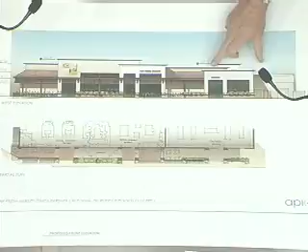That's part of the whole mass, so they really read more as 2 tenants now rather than a confusing 3 tenants of the last go-round. That addressed the height issues in terms of those pieces by themselves—we felt that was the issue in terms of them looking too high in comparison. Now with a longer, wider mass, we feel the proposal you're seeing here will create a better sense of entry and scale.

Additionally, as we've gotten further into our design, thinking about our standard equipment—some of which we'll see here—and also knowing there will be a mandatory approach to screening so you can't see rooftop equipment, the heights we're looking at now lend themselves to that screening application. We have a central piece of equipment that sits on the roof and would likely be visible from the front in our other presentation, so we think we're closer to something that will, at least from the front, conceal that piece of equipment. For your reference, the existing parapet height is this line here.

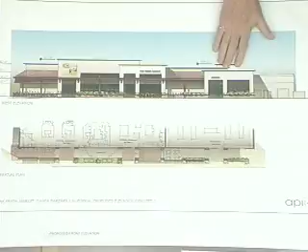We've raised this parapet approximately 2 feet on that side, just to give more of a stepped appearance to the facade. For clarity, this element here is an existing mechanical screen that we've just treated—it's right now a slatted metal. This little element is beyond, quite a bit back, almost towards the rear opposite facade, so it really looks like it's more of this facade than it actually is. It's in the background.

Additionally, to tie into the existing glue lam beams, which seemed to go over quite well, we were going to use those. In this theme, we've also incorporated a horizontal wooden louver to match, so there'd be a continuous wood theme throughout, with some extra support columns in certain locations to tie in—to give you a sense of what that louver does across the front of the building.

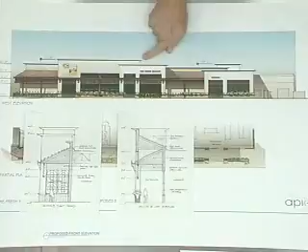You're looking at 2 sections you'd see in this application. This section here would be right through—where am I—this section with these roof elements here, right through here, looking this way. And this section here is right through this, looking in that direction. These 2 elements would be this roof here and this roof beyond here, and then the existing roof plane here with the glue lam beam running through the new columns.

And what you're seeing there is just this little wrought iron enclosure for the outdoor plant area that's under that canopy.

Okay, that takes care of item 5. We're down to item 6 then. Wow.

Number 3 was: restudy the main entrance facade to provide more architectural definition, not a single flat facade. Let's move back up to item 3, because that was a comment having to do with, in plan view, what you were doing to create definition between these. How did you address that?

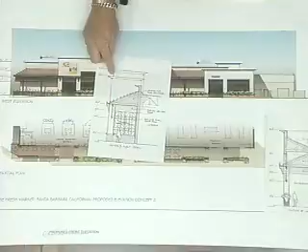Well, what we're proposing here is this particular facade is moved all the way out. This one is almost out, all the way out—that would be this line here. And then the next one steps back another 8 inches here, so there's an 8 inch difference between these, and these are completely separated. This is the existing tile roof, and this is the existing tile roof. This one actually pops out further than this face. These 2 are about the same also, but this one pops out in front.

I could just lay this down—this might help clarify some of that. Oops, I'm sorry, I got this backwards.

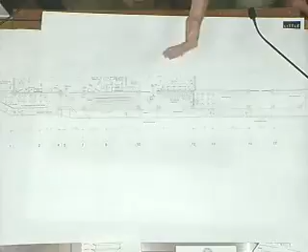Right now, the columns we're proposing, new columns here, start to generate that differentiation I think you guys are after, and we think there's even more opportunities. Perhaps take these 3, push them a little more forward, create a little more differentiation, and then that horizontal element that comes across the front of the building may have an opportunity to step back and forward with those architectural elements. So these columns are what we're seeing as that difference, and the path that we have to keep for ADA compliance and entry will help define some of those column locations.

Oh, there you go, that's a great way to look at it. So the three you see here would be these three here. Those could potentially come forward and help create a little more visual interest with this horizontal element we're looking to create across the front. So as those pieces step forward and back, it would kind of follow suit, allowing the path of travel to come behind it rather than in front of it. Exactly.

Number 4 was better harmonize the facade elements and provide appropriate signage space. Number 5 was section cuts, cut through the new entrance canopy portions. Number 6 was provide design details for the columns and parapet caps and cornices.

Since this is a new proposal, we are proposing a design that's a little bit more of a contemporary interpretation of the mission style. With that, incorporating more wood detailing in both the louver system throughout the lower portion, but also a wood cornice integrated into the upper planes as a cornice.

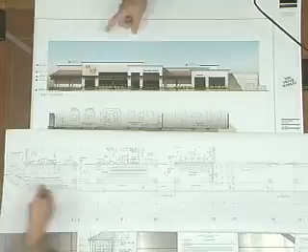But you've changed it completely, pretty much. This section right through here goes all the way to here. We were wanting a plan that showed clearly, a plan and an elevation, existing and an elevation, noting with notes.

They don't really have a consolidated drawing right now. We're kind of midstream, so to speak, on the concept, and we want to get feedback from you guys before we take the next steps. But in terms of what's there now and what you're seeing on paper here, there's most certainly a big difference. Right now, there's none of this. The front of the building runs along here, none of these columns exist. There's a few bushes that kind of follow the curb.

This is on an as-built plan, but they are right at the existing curb, and they kind of just dot along the front there. So there's really not a lot, but that's kind of the thing we really need to see, we'll save that for comments. That's kind of what we were hoping for. This is the existing, the way it is now.

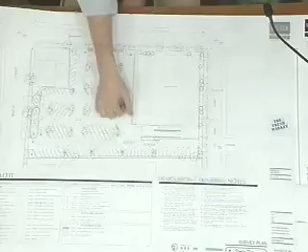And the next sheet is what we're proposing. That's what's there now, so what you don't see on this plan, you don't see the bushes themselves, but these are little concrete areas with dirt where they planted hedge bushes along the front of the building. Obviously there's no columns or anything else right now across the front of the building, just the overhang itself. Yeah, it's all open. And the proposed is where? Underneath.

So here you see the new columns, eliminating all those planters that are there. Yes, ma'am. Where are the new planters?

Currently, the plan shows planters here, but we see this planter as problematic, as well as something here and perhaps there too. I was talking to Jaime last week, and he thinks we may be able to do without them. They're not required elements. We had put them in there originally, but they conflict with some of the challenges we have now at the front and our use of space. So we think they go away at the end of the day.

So really, whatever landscaping you had, you're taking out, and you really aren't going to have any landscaping. Just at the front of the building, yes, at this point. For the front of the building? Yes, ma'am, exactly. And that was based on a very quickly developing change process.

This helps show us what's there now. We had a meeting on Wednesday, just before Thanksgiving, with Jaime, and got a little more feedback about those kind of details, and it would appear that we would likely eliminate those if possible.

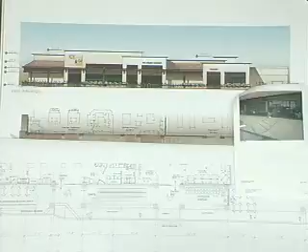Yes. We have looked at both here, and we have another example of signage. We've reduced the sign size to be more in keeping with the criteria. And there's a for-placement-only item here that we'd like to get your reaction on. We're thinking that's an artistic graphic, so possibly - just to clarify, this drawing represents what would be the 12-inch lettering that you guys typically approve.

Actually, we don't approve any signage. Okay, we just wanted you to address where you were going to propose signage for when you submitted to the sign committee. Right. So, okay, it's showing that part, and then it does show this kind of graphic application that we've got a few details to work out.

This right here represents what we think we'd likely apply for an exception on. You'd probably see the actual letters here. We think the graphic element would happen there, and then of course you'd see the tenant signage over here. This is closer to what we think in terms of this element, especially for the right proportion of signage.

We're off the street - we know that's a different conversation with folks, but it does represent our current thinking on signage. We don't think we'd see this. This is our signage guy maybe proposing, but that's likely not something we'd do, knowing the limitations.

All right, is that the end of your presentation? Well...

I would like to mention as well, part of the last comments and maybe understandings with the city was that the application we have here for the outdoor floral department - I think there were some question marks about whether that was allowed and could we do it here.

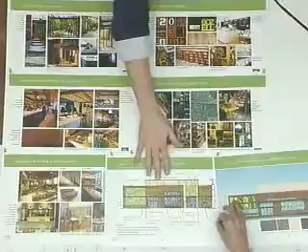It's that contemporary interpretation, exactly, of that mission approach. This was something the folks who put this together for us came up with, one of their first stabs at an elevation. Nowhere near what we're going to wind up with, but it was a result of trying to bring these elements to the outside. Then they went further to say, okay, here's some ideas about signage and more about this graphic element you might see. That's really what you'd see here, just a graphic at the end of the day. There's been a real design process on our side to bring the inside to a different point than we normally do in the store. This is really going to be a special store for us, and then we'll work with you guys to bring some of those design elements out and make this a real reflection of what we're doing on the inside.

Just before we go into questions from the board or public comment, a clarification from staff about the graphics. Doesn't the ABR or sign committee have limitations on murals? Don't we have issues with murals, Tony? Let me see what the sign ordinance has to say, but I think we'd consider that to be a wall sign, part of the sign, reviewed by the sign committee. I want to make sure we address it if we need to, and if we're not supposed to, we don't. That's the sign committee's purview. We did speak with Jaime on Wednesday about it, and we wouldn't consider it signage since it doesn't have lettering, it's more of a graphic. That's why I asked if it was considered a mural and whether we should comment on it or whether sign committee should. But as an architectural element, perhaps it's in your purview. Perhaps it is, I just need clarification from you, Tony, before we spend time talking about it.

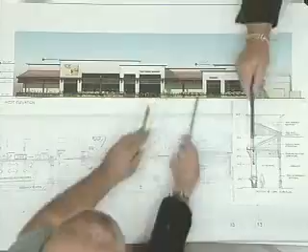Does this come around the columns at this point, does it come through? How far proud is that from this? It's showing one long line. Yeah, right - this will die in between these two columns, and this is projecting out in front. So it's just one line that comes through these columns, is that correct? This section here is popping out in front. And this can actually all be in one line because this is set further back.

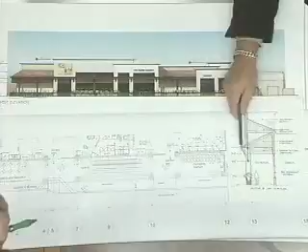8 inches back - right, same here. I think the dimension you're after is probably 18 to 24 inches, that it would project off the face of any of those new facades, and even the existing roof element here. And this is solid, or does it go back? It's right here - the existing roof ends somewhere close to here. This 18-inch projection is what you're asking about, from here to here. Those existing projections become the structure, so to speak, for that new element to rest on.

Part of the problem is we're asking these questions because the drawings don't give us the information we need. We don't have a line of existing roof, we don't have a line of new trellis. Also these columns right here are at the same plane as these other columns - but you're telling me these ones are 8 inches back, so I'm having trouble knowing what the depth is. We realize that some of those details aren't quite fleshed out yet. This was simply because of the comments from the last meeting - we went back and rethought the issues. We still have some thinking to do. We're looking to get your comments and take that next step on design, probably defining that stuff in a more comprehensible way. But I think there's enough here that you get the general idea of what we're trying to achieve design-wise.

Any more questions, Gary? Yeah, on the graphic right here, is this going to be a graphic that changes, or is it going to be a permanent type graphic? Is it going to be adhered to the plaster, or is there going to be something proud from that? We talked about it, and it's probably to be determined, but likely it's not something that changes with any regularity. It's likely an element - we talked about maybe a metal mesh that has screen printing on it, but it's an architectural element that is attached to the building.

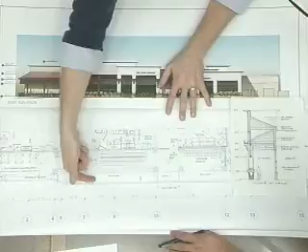Jose is working with the folks in traffic to get some of the details, but in the unlikely event that can't happen, we're thinking we have a curb cut here, an apron here, curb cut here, an apron here, and because of those details we can't allow ADA compliant pedestrian traffic to flow in front of the columns. So the approach may be to bring these elements forward as far as we can and let traffic flow behind the columns and then get to the other tenant spaces over here.

You haven't resolved that yet? We haven't. It's an easy adjustment, it doesn't really affect to any great degree what you see here, it's just you'll see those elements. It does affect it a lot, probably 4.5 feet, if the columns come forward more.

Well, from a strictly elevation standpoint, you wouldn't see much of a change. From a sectional standpoint, yeah, you would see the difference. It would allow us to have much more dimensional interplay between how far this is out and where this is. Right now we're dealing with the ADA setback there that only allows us 8 to 10 inches, where if we move this forward we'd have much more flexibility to get plan variation to the elevation.

And to your question, as a maybe primary entry point - if this element was pulled forward, it may have more of a statement about that primary entrance. Most definitely, and give that main signage field a better place to live. Thank you.

Thanks Paul. Kirk, I just have one further question - last time it was mentioned by Tony that this corner dining spot was possibly set back. Is that correct? The question was the front setback, and we determined that an outdoor patio seating can encroach into a front setback there. Okay, that's my only question.

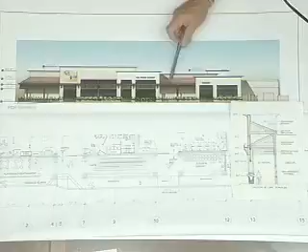Thanks Kirk. Stephanie - the color scheme that you presented shows kind of 3 different colored stuccos, I see. Is that your intention? Well, certainly 2. It is pretty prevalent, these 2 colors, the white stucco and the off-white stucco. I think with the dimension of the barrel tile that we have, that could be this same color as well, but it's meant to give a foreground and background appearance to these elements, helping them stand out. I think if we move this architecture out in plan, it'll be even less necessary.

But we could certainly, for the next go-around, if your concern is we have too many colors on the building, step that back to these 2. I guess I'll save it for a comment. Any more questions? Yeah, Stephanie?

I just have one other question - regarding the planting, you're showing planting on the elevation, not on the plan, and then verbally you're representing that there probably won't be any planting. So why is the planting on the elevation? We just haven't had a chance to make that revision, there have been several moving parts trying to come together to meet with you guys today.

Okay, and one other question - this section looks like tile on this lower band.

Is that part of the plan we're seeing here? If you look closely, there's a tile pattern on here in terracotta, and the hope is to get a good match to the terracotta on the roof tiles. In this case, it's on the building itself, as a wainscot on the building, and then around each column.

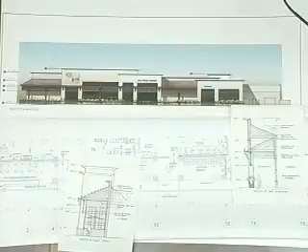Madam Chair, I have one more question, about lighting. Is there any proposed lighting fixtures on the exterior? There will be, but we don't have any specs on that right now.

There's that one section you did that had kind of a light detail on it. Don't want to confuse the issues, but I think it might be right there. I thought that was not a bad iteration for something we might consider. It's an element we've seen in some other places around here, something along these lines. We haven't fully defined that as of yet.

Any more questions, Stephanie? No, Madam Chair, I think I just had one. Compared to the last submittal, the comment we made was to lower the parapet height significantly. What was the existing height?

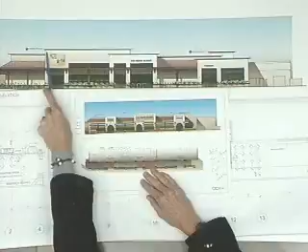How did you address that comment? So this one is 30 feet 8, and this is 33. So now you went higher here. These actually got higher. And these two got lower by 3 feet something. This one got the existing parapet height here, so this one is 30 feet 8 here. You were 30 feet 8 in this element before, so this got 2 feet lower.

This got over 3 feet higher. I guess if you want to look at three separate elements, you could say, compared to what you see as an element here, here, and here, yes, there was some change.

However, as I mentioned before, the thought process behind that was that because of the screening requirement, which we now understand to be a requirement, I'm not sure we were quite there before. Where the equipment sits on the building, if you don't have this component here to some degree, we'll wind up with screening that's going to jut up.

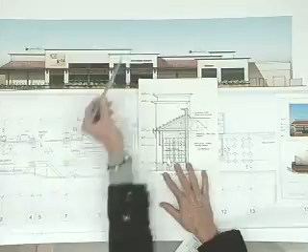That brings me to my next question. This is kind of a section cut through here because you're showing these two in the background. So it's through here, this one is. So what you're saying is that you need this height as justification for your screening, but it's screening from the public right-of-way. It's not screening from an airplane flying over Milpa Street.

Right, well sight lines are important, and they'll show us all the details. But sometimes when we're joking with people, we say that we're going to park a small bus on this building. Our mechanical equipment includes a Seasons 4 unit, a whole store unit. It's a fairly large piece of equipment, and it will have a height off of the existing roof line that will, at the end of the day, require some screening of this height range.

Are you saying it's going to be this tall? Yes, sir. We have a refrigeration rack up there as well. Well, the refrigeration rack sits further back on the plan. This piece of equipment is kind of center to a little forward, typically.

So here's my question. Here's my approximate line of sight from Milpa Street, which is the farthest place anybody would be looking to. If you're close to the building, you're not going to see rooftop equipment that's even that big over the existing building. But let's say, for argument's sake, you're way out here on Milpa Street, and you've got a line of sight that's huge. Your equipment would have to be 15, 20 feet tall in order to need to be screened by something that big.

15, 20, maybe not. To give you a range, the equipment itself is 7 feet high, and it typically sits on a curb that's about 2 feet high. So you're approximately 9 feet in height.

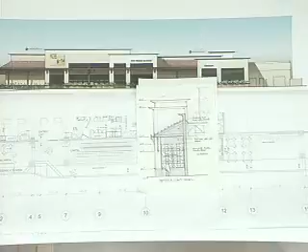But there again, that was the thinking behind leaving that as a higher element, was about screening. And also, I think there's a desire and intent to get a little visibility on this building. We're off the street a fair distance. We've got a lot of existing landscaping and foliage that can't go away significantly. So we're trying to counteract some of those with a double approach here, screening and also added visibility.

One of the other comments too. Really quick, because we're in questions and we're already behind by 15 minutes. We have to make our comments.

I just wanted to add one comment to that. I know one of the statements last time we were here was kind of massing the Fresh Market entrance and the other tenant space, and what this iteration also does is it kind of ties those two entrances together so that you can see where Fresh Market is and where the other tenant space is. Okay, thanks.

Okay, comments. Do you want to start, Stephanie? Sure.

First of all, to address the last comment, I disagree. I feel like these two, looking similar in massing and size and color, tend to make this look like those are the two entrances for this store, not the entrance for the other tenant.

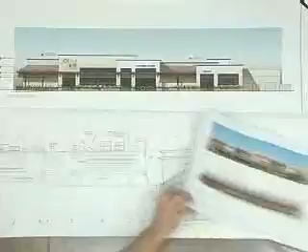And then the parapet heights, there's another thing I'm disappointed on. Even the existing parapet height went up from 24.6 to 26.8. It went up another 2 feet. So the very clear direction that was given last time... No, it went up to 30. I'm talking about this one, the existing one. Oh, you mean that one went up too? Yeah.

The two rationales I heard were, one, visibility for the building, and two, to screen equipment. But if you're going to use the rationale of screening equipment, we need to see where the equipment is on the roof. We need a roof plan, and we need to see specs that show how tall that equipment is.

So if I understand, we are concerned about visibility of equipment as well, very much so, and we would want to see enclosures around that equipment. But I'm doubting that doing it with the front facade is the right way to do it. In fact, I'm almost certain that doing it with the front facade is not the right way to do it.

It could be further back. It could be another location. I think what's happening back there is fine, and maybe that's the answer for the other units and other equipment that you're going to put on the roof. Have more of those in select areas, but not... I don't know what that length is. A 50-foot long parapet.

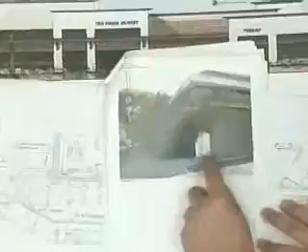You've got a really tight corner right here, and this curb cut that exists. I look at the photographs and I stare at it, trying to figure out in my mind how wide this is. There's a better picture, but I can't find it, between the red curb and the building and the activities you're going to be putting in here.

Then I see that a bad thing about the existing situation is this wide sea of asphalt between the parking lot and the building. The more you can bring out a walkway, encouraging pedestrian activity, having your tables and chairs, those are all great positive things. I don't know how much you can pull it out there, but I see this as being really tight here, coming across here, which is why I was asking these questions.

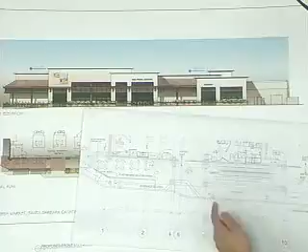If you have a zero curb line, we've got those stupid little bumps we have to live with, and then hopefully you can have a 3-foot wide or 44-inch walkway between the bumps and the building. There are design issues that get triggered, but you have something great you're working on, it's also very tight and confining. So when you come back and think about this, consider how you're addressing this corner with how much room you have to work with.

What I liked about your old design, it had like a Bennigan's restaurant feel to me. It was kind of fun and happy, and you could just see activity and a buzz. This is pretty stark. It doesn't have as much flavor and color. Losing this roof, having that big, huge parapet - wait, clarification, that's the existing roof? No, you lost this roof by putting this parapet in front of it.

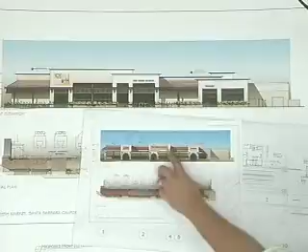These awnings here, based upon your section, the rain that gets onto here, the louvers, it's wrong. It's not looking like a sound building solution. So you've got a challenging building because the scale is so large, but it's also a great opportunity to humanize it.

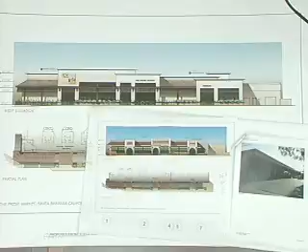I'm really concerned about this, as everyone is, but I'm more concerned about your graphic. There's one thing about Santa Barbara - in the late 60s, it said no more billboards. There are no billboards in town. We don't have any. You can drive around, you don't see billboards. And to me, this is a billboard.

When you go up there and put a picture, a picture of fruit, and you're saying this is the fresh market, with a billboard on it - this type of graphic is something we've gone away from a long time ago. To bring it back is really not Santa Barbara. This type of architecture, or type of design, in a situation like this, is not in character with anything we have in Santa Barbara. And I, for one, although nobody has mentioned anything about this, would be very strongly opposed to this type of design being on the building.

I just don't think it's allowed. Well, regardless of whether it's allowed on the sign department or not, I think this isn't allowed as an architectural element, if it's proposed as an architectural element. That's why I wanted clarification from staff on whether or not we should even be talking about it.

So, thank you for your comment. And if you come back and say it's an element and you're going to put screening on it, but the screening is still going to end up looking like a billboard, just a little more modern, I just don't think it's something that will work on the exterior of the building.

It's fine in the interior of the building, but on the exterior, for me, it wouldn't be something that I would look forward to. So I'm going to leave it at that, and I agree with a lot of the other comments, including the wood comments that were here and so forth.

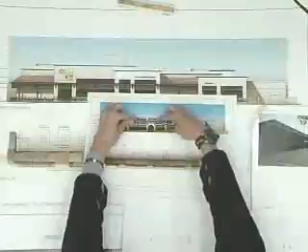If you drew this in 3 dimensions, like I said, if this were drawn at 1/4-inch, I would say you're on the right track. In fact, if in the last submittal you had submitted something like this element and that element without any of this up above it, and these little elements just penetrated and came up above the existing tile roof as entry elements so you could define your entry, I think that would have been a really great approach.

But you're doubling the height of the front of this building. And I don't think the front of this building should be any higher than it already is.

So I think that maybe—I tried to make sure it was in the minutes last week because the motion was made, and I tried to come back and make sure we wrote the word 'significantly.' You guys heard me: significantly reduce the parapet. And you not only didn't significantly reduce it, you raised it.

So I don't agree with whoever said that a lot of thought has gone into this, because we don't have complete drawings. We don't have a proposal that we can even comment on. We spent the entire time asking questions about what you're proposing and what you're not proposing. These are shown to be popped out, but this one looks like it could never tie into that, and it's because we can't read what you're proposing and what's new versus existing.

So, aside from all the discrepancies in the drawings and the lack of information, landscaping, and detailing, on top of all that, the biggest thing is still that I think you're double the size you should be on this. That's what I'm being really careful about, how strongly I make that statement this time, because I don't think it got through last time.

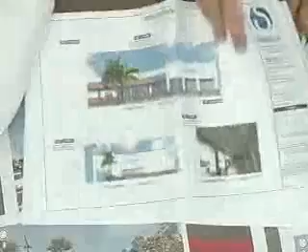That's a merger, a corporate merger. Okay, and that's the whole proposal, right? Correct, right.

Now, I should read this before we go into public comment, if there is any. This is their letter justifying why they think the exception should be granted. Their argument was that they didn't feel it was a separate site, right? Right. I guess that was contained within it, within that, okay.

Here's something, I don't know if you mentioned this part of it, Ken. This is a letter from Ken Sargman. It would seem logical to also include all sites when analyzing the sign program. Do you guys want to hear this part? Under this assumption, adding an additional sign at the existing monument would not be considered off-site.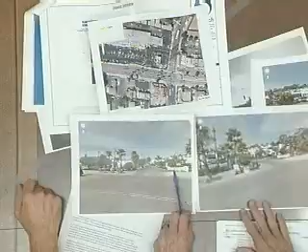I wanted to point out there are planters on both sides of the entrance along the Cliff Drive portion, the Cliff Drive entrance. This is Cliff, and there's Chase back here, the Chase building. This one is Meigs Road, and that one is also Meigs Road - they're both Meigs. We have a Cliff Drive, and there's the other one - two, one on Meigs and one on Cliff.

So, same deal - there are planters on both sides of the entrances, and I'm wondering why other locations haven't been sought. Well, there really isn't very much room on those planter walls at all. As it is now, the lettering is pretty low on the wall. I don't know if you can see it well here, but it really wouldn't have much visibility effect. I'm not saying on the wall itself necessarily, but in the surrounding planters you could have another sign.

The thought was that this would be a cleaner approach, since this monument was existing already, adding another monument. So that's my second question. I guess that's my other question - did you consider adding, if you wanted to have a corner sign, there is a sizable planter there that you could have another monument? It would still be an off-site issue. Okay, it would still be the same issue. But-

Is it at the very corner sign, or is it the corner one on Cliff? It's the same one, on Cliff. It's only one? Because I thought there was one there, but maybe not. Maybe I'm seeing the one where you did the graphic of the two. Yeah, so that's on the corner, that's that one.

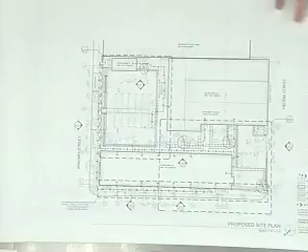That has instigated some rethinking of this central courtyard space and how this area works. The restaurant tenant is actually taking this portion of the building, including back here and that little building. So in the process of dealing with that tenant, they've wanted to rethink how this was originally laid out and approved, back in March of this year, when we had no tenants. We didn't know what we were doing, we were just getting it ready. So I will go through these as quickly as possible.

Actually, let me get back to this. As many of you will remember, we had a series of these gabions, which are these steel cages with debris - some are actually construction debris, some are wine bottles. Those are still staying. The design is more or less the same.

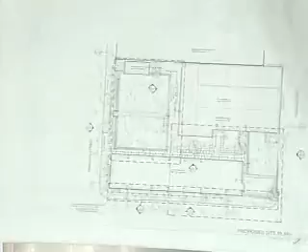We've actually added more landscaping, which is a good thing, and we've taken away some hardscaping, which is a good thing. The elements are still the same, they've just been shifted around a little bit to create some private patios for the restaurant, as well as ABC enclosures and things like that we need to deal with. So that's really the impetus for these changes.

Nothing has changed along this side here. This is all relative, this is all the same as was originally approved, as well as this, and as well as all the parking field. So really, the changes that we've done go from this facade to that facade, edge of the parking lot to here, and through here and around the corner.

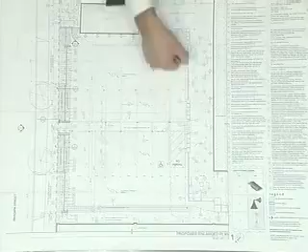Really, like I said, it's a shuffling of materials. We've got some planter boxes in the front now. We have some fencing along here to create a private dining experience, as well as ABC enclosure. We've added a low fencing along here, some additional plantings and planters here. This tree, I think, was relocated, shifted over. We're adding more plantings along this facade. The trellis that was originally here is more or less in the same location, it just got a little bit wider in that direction.

We'll go through some of these.

On this sheet, this is kind of the central court. I'm just going to kind of point out things that are changing and things that are staying so you get the sense of it. This is exactly as what was approved, so is this gabion and all the bike parking. This is a new gabion.

So we've actually turned the corner because this is going to be a tenant that needs an ABC enclosure as well. This is an access point for another tenant that's going in here, so that's why that's kind of sectioned off. These are all large planters, so whereas these were planters originally approved, they've just sort of changed dimension. We've added a tree, this is new, as well as some fire pits out here for the restaurant dining.

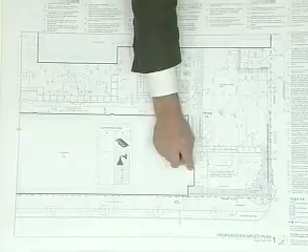Nothing's changed over here. We've actually had to add, based on the way our utilities are coming in, we needed an enclosure here, so we've designed an addition to this building, which you'll see on the elevations. Trash enclosure had to move a little bit based on plan check corrections, so that's a change from what was originally approved at ABR.

Missing anything else on this sheet? We've pulled out concrete and put pavers in here. The rest of this is all concrete, which was originally approved. This is all concrete originally approved.

Since this is building A, electrical and mechanical, that's this right here. And then we have these elements that come over the roof that screen the mechanical. We've had to make them larger based on tenant needs, and we'll go to those too.

So here's the front trellis that you see from the front of the old Bay Cafe restaurant here. The trellis has actually broken up into a little bit different format, but it's largely the same material, it's just changed shape a bit. This is the front fencing, which there was no change to that.

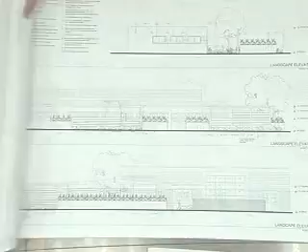Here's a courtyard elevation looking back at building B, again showing the gabions and the planters and the plantings, the new tree. Here's some of the fence material, so that's changed from what was previously approved.

Here's, again, looking at the parking lot side of the building B, where we have some of that fencing wrapping the corner, and then it drops down to a lower height along here for ABC enclosure. And then the trellis is here, and it's basically a steel trellis, like we had before with wood slat across the top.

I want to come back to, so a lot of these drawings are drawings that you saw before. I don't expect you to remember all the details, so a lot of these details come out.

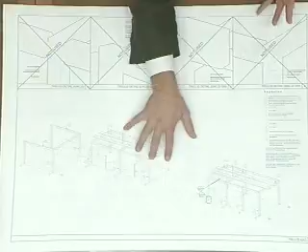We've simplified the trellis. It's still tube steel box framed with these large planks on the top, and that integrates with... It's open air, no netting or anything. There was more 2x materials before, and they were spread out and a little bit more broken up, so we've gone a little bit more open because this is the northeast side of the building. We wanted to open it up a little bit more, and then these help support with lighting and things out here for seating under the patio.

So really, the design's fairly similar, it's just simplified up a little bit on the wood elements.

A couple things have shifted on this plan from what you saw. There's that enclosure here, and we've changed some of the swings of some of these doors. This door actually was here, but it had to relocate here so we could get our ADA slopes to work. That's pretty benign at this point.

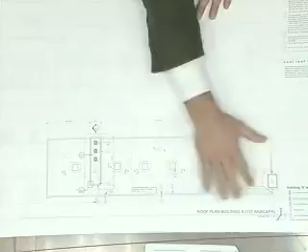On the roof, this is the roof of Building A. Here's that enclosure, I'll show you in elevation. These are the equipment wells up here. They were originally about this long, and we've extended them out because we needed more mechanical space to service the tenants currently coming into the building, which go from here to here. This one's left open, so we've made it longer just in case, since we're anticipating someone might come in and need additional mechanical. But this is all screened, so you can't see it from the street.

Here's an elevation of it. Again, this is what was approved. These had to slide over a little bit from what was approved, and then they got longer in that direction, which you see on the Anacapa elevation. Whereas they were once here, roughly here, they've now gotten a little bit bigger to accommodate mechanical, so we can screen it all.

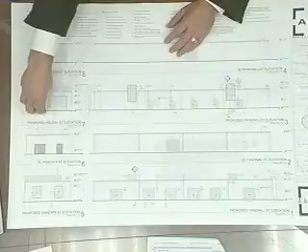Here's the electrical enclosure on the west side of the property. Originally what was approved was a bunch of switchgear just sitting outside exposed, and with this patio and some alterations in the service that we needed to get larger, we decided to go ahead and do an enclosure. We're going with Corten steel, which could be used for signage or something like that for the tenant.

The palette of the project is rusted steel, Corten steel, corrugated steel, brick, CMU, and concrete. This whole building is all CMU. These lighting locations shifted over a little bit, but those are kind of minor.

Here's a section through one of those wells on the roof for the mechanical. This is the additional space we needed for the tenants currently going into the building. There are a couple door and window changes, but again, most of this is just recording what we've been doing.

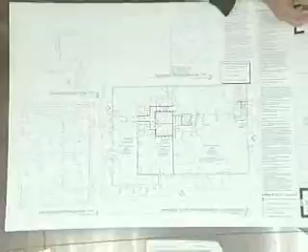So here we're at Building B, and what's changed - we came back here a couple weeks ago on consent for a different window or door style for the tenants. We've added this little door here, made the change per your comment, Paul.

This changed from what we had originally as well. We actually need this as an egress point, so we've got a little alcove recess.

This is adding some skylights on this back building here. These are existing skylights; these would be new.

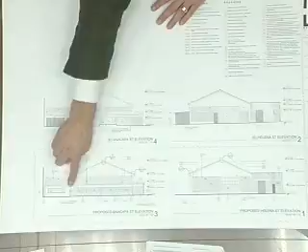From an elevation standpoint, this was the old Bay Cafe, and then this is what we just came in and changed - these doors out for the tenant. And this is that alcove that you see here, which will be brick on the interior. And then we infilled these doors - that's actually the alcove, and that's the door being infilled.

Again, the doors have changed per the tenant's requests, and largely the rest of this is the same.

This little building we call Building C. It used to be the old ice house or ice box for the fish market. It's had some changes to the windows - the door is more or less the same, but the windows have changed location. This is what it used to look like. We've pulled that eyebrow off, a little tile eyebrow, and we're really just simplifying the building. I want to come back and talk about Building C in a minute, because there's a couple things we're exploring on that.

And then landscaping - there's a lot of things here. It's kind of hard to digest all at once, but I'll walk you through. The paving material hasn't changed, but mostly the patterning has. This is all, as I mentioned, largely the same. This is all the same over here.

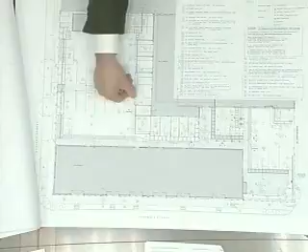That gabion shifted, this went to permeable. This is existing concrete; this is going to be new concrete with some scoring lines. And then there's the new trellis, the planter boxes, and the new tree, and there's new planting here. We've actually lined the edge of the parking lot from the ADA enclosure with plantings now - plantings here, planter boxes, plantings all along here and all along there. So that's been a nice change to the project.

I'm sure you guys want to look at all the plants. You want to go through all the plants?

So one of the things - I know Chris isn't here today - so just on a conceptual level, I wanted to show you some of the items here, some of the renderings that we have on the project.

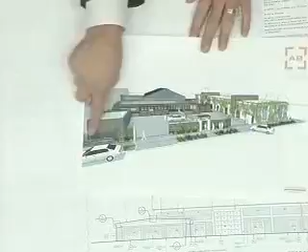So here you can see this is the CMU building, or Building A. These have gotten a little bit longer to accommodate the equipment. This hasn't changed here at all. This is Building C, which we've added some lights and changed the windows.

These are the new planter boxes, same as what we were using before, just in different locations. They're large rust Corten steel boxes, and then this low fence here with the trellis members - a trellis member, then a light bollard, then a trellis member.

This is kind of the main entry here. Again, planter boxes flanking that entry access aisle from Anacapa. And then this fence comes along here, and then it jumps up a little taller to create a nice private dining area in there. I'll come back to this in one second.

This is all Building C here? Or is there more? Okay.

So here's another view just across the parking lot. This is the truncated domes. This is looking at the fence and the materials.

Again, here's some colored elevations just to see the different materials. That's an existing brick panel in the building that we're keeping. That's on the building, same plane as that gray. Same plane? No, this is back about 20 feet. It's the same plane as that. Okay, same plane as that.

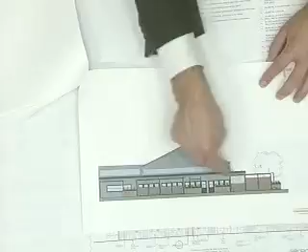Yeah, exactly. Most of this building, the big warehouse, is all concrete frame with brick infill, and then there's brick on this, and that wraps that corner, Paul, and that's where that panel is. And then it goes to concrete frame and doors. Here's that interior court elevation.

One of the things we're looking at doing is painting out the concrete elements here in a dark graphite color to help make some of these items pop, and it's the desire of the owner to give it a little bit of color.

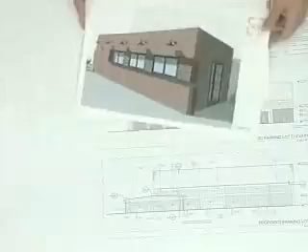And the last thing I want to talk about, because I'm sure you'll have tons of questions - on Building C, which is the little building, we didn't have this in the plans. It's kind of a new idea with the owner on what to do with this little building. Everybody kind of wants to turn it into something.

What we've proposed in the drawings here is to just clean up the building with plaster and paint it the graphite gray color. New windows along here. They would have some awnings and some new lighting across there.

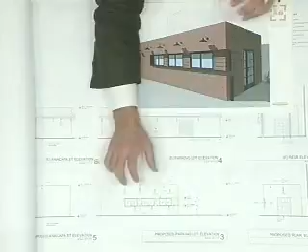One of the ideas floated this week is to actually wrap the building with pennies. So we've done a little mock-up of what that could look like. In terms of the client and the owner, everyone's been talking about this as the little jewel box on the site and what to do with it, so there's been lots of exploration. One of the ideas that came up was to wrap it in pennies, so we wanted to bring it as a - get your guys' temperature on it and see what you thought, because it's kind of unique.

It's a unique thought. Did I miss anything? No. I'm sure you're going to have tons of questions, so I'll complete there.

All right. Any public comment on this item? All right, none. Questions from the board? Who wants to start? Who has a question? I'll start.

You said something, kept saying ABC enclosure? ABC - is that Alcoholic Beverage Control? That's what I thought. Restaurant meant. Yeah, so we call it that back east. Sorry, I haven't heard it out here.

The brick that you're proposing - are you going to sandblast it, treat it how? Is it existing? It's all existing brick. So you're going to sandblast it? So is it all the same, or not treated at all? We're just going to leave it.

Okay. And any new brick? Is there any new brick proposed in that little enclosure area you were talking about, the vestibule? That would be on the inside. It'll be a brick veneer to match as close as we can.

Did you consider brick for the elevation of building C at all? When I first saw your rendering, I thought that was a brick material being proposed, but you said it was pennies. Have you thought of any other materials for that besides pennies? We've been around and around, and that's one that seems to stick with the tenants and the owners at the moment.

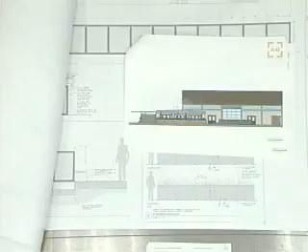So you've got angles all the way around, and then you've got a steel mesh, and then you fill it with whatever you want. In this case, we've chosen in a couple of these wine bottles, old wine bottles, because we have several wine-based tenants going in here, in addition to the restaurant. And then on a couple of them we've gone with construction debris, so it ends up having kind of a repurposed effect, if you will.

Was this cantilever also part of the original approval, or is that a change? That's the fun of an elevation. That's something way in the background. You're actually seeing a different trellis.

Let me go to the other page. There's a trellis frame here. This is going to be a private dining spot. So you're seeing it's cut off, but you're seeing that in elevation beyond. You're looking down this line here, and then that's coming way out here, and you're not seeing that post. It's just one of the things you deal with in elevation.

So you'll be able to see it from the street. Okay, and most of the time, actually, it was required that these gates be open during normal business hours, so it will be visible through there as well. Okay, those are my questions.

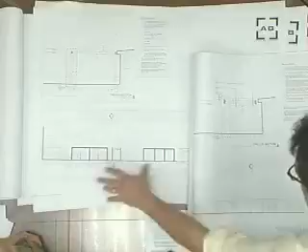Thanks Paul, I just want to compare the two elevations. Sure, this one? Yeah, this one. And Kirk, even though you weren't here for it, you can make it, your opinion would matter, it can be included. This is what was proposed originally, and this is where we're at. Am I right? This was what was approved in March, and this is what we're now coming forward with.

So these were all steel. It was a metal, it was always metal, but now the frame is like a rigid frame, welded steel. And then what I also want to point out to the other board members is this was the look that was actually on the top, and now it's those slats. Two slats, here it is right here.

There's been a desire, because of the proximity to the train tracks, that it sort of mimics train tracks. So are you going to use... somewhat. You're not going to use actual train tracks, then? No, you're not going to use...

Any more questions? We don't want to use railroad ties because they're pretty toxic, and you're right above patio seating. Any more questions, Gary? Kurt?

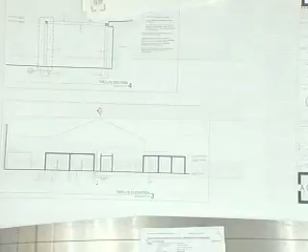It's kind of hard to see in this, but basically what we've been looking at is the trellis area, which signifies where people are sitting and dining, and this is going to be the entrance.

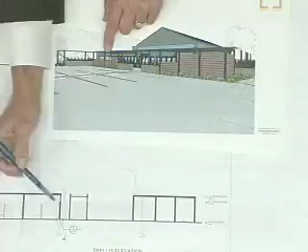So what we're doing, we've gone around and around with how to create wayfinding to get to this spot, so you're walking up and you know it's there. What we've done is we've broken the trellis and taken this area out, here and here, and we'll flank it with the planters. And we keep this as negative space.

So this acts as negative space, and then we're putting a simple little element - it's hard to see, but basically we have two steel posts coming up that will attach to the concrete lintel across here. It'll be just a little flat steel eyebrow that comes out with a little light on it, and that'll signify the door. We're intentionally trying to do something different from this so it creates individuality based on this negative zone of trellis, giving it an entry piece.

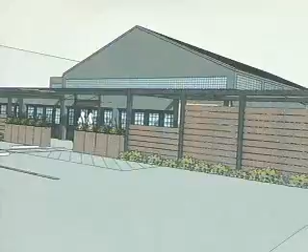Okay, one further question - sorry. That's all right, that was helpful. Were these slats always shown coming up to that height, or was that a change too?

Originally, we didn't have anything here because we actually originally had a gabion here in the approved set, which is sitting there. Like 4 foot high? Yeah.

And now that we have a tenant and we're working with them on how to envision their outdoor space, they've come to us and said they want to have this area where people can feel like they're not sitting in the parking lot all the time. So that's why this got higher in this location. There's a little fire pit out here, and people can sit out there and enjoy it.

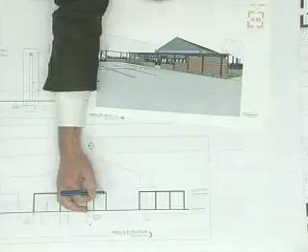Just how far does this come out in front of this building? It's two - a little deceiving, I'm sorry about the elevation, we should have had a close-up. Basically, there's a steel pole that's going to come up attached to the face of the building, and it'll have a little awning that sticks out over the front door. Perfect, 4 feet. And this is like 16 feet in front, and that's what gave you the negative space.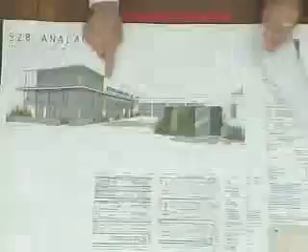I think he was actually referring to this part of the building. Originally, we had metal to match what the French press had done. If I can find that.

The French press had this galvanized metal panel kind of skirting the parapet here. We had proposed that previously in a larger scale, and the board was a little concerned about the material. What we've opted to do is go with a kind of louvered.

Corrugated metal that matches the metal we're using in the awnings. It matches the awnings that were done over there. So we're still staying with a metal panel. It just looked appropriate when we looked at this instead of doing that out of paint or color or something.

Item 2, the board is concerned about the trash enclosure detail. If the planting becomes unsightly, address the concern with the landscape architect. And here he is.

Do you want to give your color? Sure. Is it the same kind of solution? Yes, it's the same solution. There's some details which maybe will address some concerns. Let's see here.

So this is a prefabricated unit, and this describes the attachment method and a little bit about its manufacture. It's a non-compostable, non-decomposing polypropylene fabric, non-woven, totally UV resistant, as well as the backing. The backing is a 10 millimeter corrugated plastic, which is very rigid and very resistant. It's recycled plastic, EPDM.

So it actually looks really good right when it's installed. It actually just looks like you're putting up a really soft black felt, and it looks good at install. And what you do is the plants themselves are wrapped again in a polypropylene, and they're tucked into each one of those pockets. So what you have is this black felt with these little green sprigs coming out. It looks good from day one.

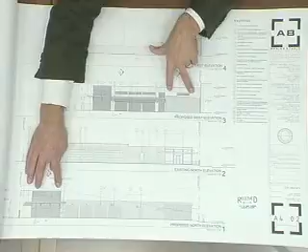Did anything else change on the elevation since the last review, or is it just those metal panels? That changed. We changed a window over here. We needed some more shear in this part of the building, so we had a couple windows. I think we had two side by side, two of these, and in that zone it got smaller. That reduced in scale. We're showing lighting along here now. The awning, I think the last time we were here, the awning came all the way over. I'm pretty sure that was already there.

A couple things on the landscape plan changed, just in the front patio configuration. Let's see. Here, you get yours? Sure. There it is. Are they?

So this was all consistent. This change, we've got a low wall kind of at the sidewalk that's very similar to what they've done here on this side, and then we've got some planters. We're anticipating, at least for now, that some tenant might come that wants to be able to have that a little bit more private as a patio. That was a change. This hasn't really changed.

I can't think of anything else at the moment, Kirk. Okay, I did have another question about the elevations.

These little columns are plaster also in between? They're going to be plastered, yeah. They're actually steel, but we'll wrap them. Actually, no, this is wood. Wait, no, these are steel. Okay, we were just talking about this. So it'll be finished out to match the body of the building.

Did you consider making those steel to match the doors, or match the other trim finishes, the other steel finishes, as opposed to a thin little element of plaster? Yeah, I could go either way on that. Just these two right here. Yeah, in between the windows up above as well. Just those thin little elements. We could just wrap it with brake metal.

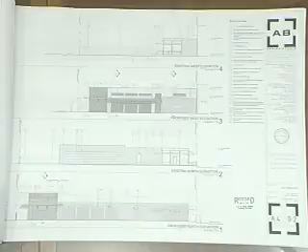These are wood, these are existing, or wood, or what are those? They're steel, painted. Or they're steel and they're painted. They're tube steel and they're painted today.

I don't have any other questions. Okay, Gary, do you have any questions? On the galvanized metal that you're using for the new detail above there.

I'm looking on A402, and it says that you're going to use a Type B wide ribbed galvanized roof decking material for that. Do you have a sample of what that's going to be like, or a cut sheet or something? We don't have a sample.

It appears that's what was installed on the French press canopy. Is that what's on the French press canopy? Yeah, wide rib. So it's not corrugated. I know what square box decking is, and it's not the angled bead edge, not the beaded edge or the V groove one. It doesn't have holes in it. No.

Okay, fine, and I didn't notice it on there, so I won't notice it there. Then on the landscaping, what type of material? It says it's mounted on hat channel. Is that going to be just mounted on galvanized hat channel? It's not visible, but yeah.

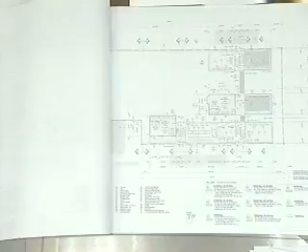So that's really that major thing. I wanted to go back on the thing about the facades and just talk about that attention. So you've seen that we've broken up the facade looking at the north and south, where this is really the major thing. And also, because the parapets have come down to 30 inches, plus subtracted another 7 inches, we've lowered the heights of the building all along the street. And I just wanted to, because it got brought up last time, give a little bit of the history.

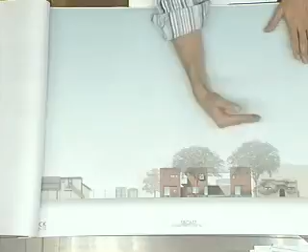This will be the only thing I do about history - once upon a time we did study this building, this portion next to the bungalow, being a one-story building facing the street, and then having it 2 stories at the back. And what had happened when we presented that to the commission, to the board, to get a pro and con, most people felt that the aesthetic went downhill, that it was better the way it was presented originally with 3 similar volumes.

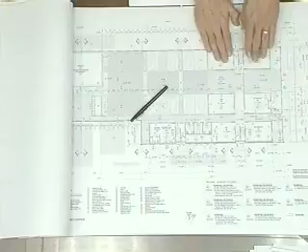It was also pointed out that the sun studies made sense in plan to provide light at the back, because that's where your western light's coming from. In other words, if you have light coming across the site this way, that's actually going to benefit this side unit more to have the lower unit at the back rather than at the front. And so that's what we've stayed with, and I just wanted to go through that history because we actually had studied that in the first incarnation.

So, am I on the wrong elevation? No, I'm on the correct elevation. Here's the front building, and then there's the back building, so that it's lower than that one is. So anyway, just wanted to address that.

And the rest of it, I think, unless there's something new you want to present, I think we're pretty good, so we're ready for questions. And if there's anything new in landscape, you're basically available to answer questions as well.

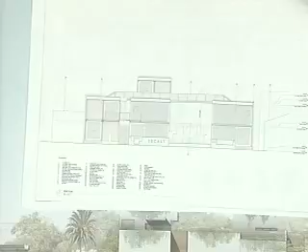Just to put it in that context, apples to apples. I understand that, but I just don't want them to think that we're 30 feet at the street - no, it's right, 12 and change. Okay, did you get your question answered? So we can reiterate that the project, when it was approved for project design approval, was at 34.2, and now it's at 36.17, which is basically 2 feet higher than what it was previously.

From the same point, apples to apples, that's the plus. Correct. Since obviously we're going with wood framing, we don't have to have 7-foot, 10-inch ceilings, which is what the shipping containers would have limited us to.

Okay, go ahead. So looking at this southeast elevation again, a couple of questions. Is this a plaster canopy that's projecting out, or how is that detailed? It'll be a brow, and it'll probably be detailed with a fine edge, like the Corten paneling. Okay, so you haven't detailed it yet? It's deep because there's a heavy shadow line underneath it. It'll be protecting, basically, a sliding glass door from the elements.

So it'll be a 2-foot projection, or 3, or what are you imagining? Probably like 3 feet or something. We'll dial it in based upon the sun angle and a little bit of rain protection.

Okay, and then this thin, it looks like a plaster wall coming up alongside where the stair element is. Yes, it looks like it's proud of the surface - that's right, but is it protecting this roof? Is it a necessary element that's coming up? Does it have to come up that high? Could it be set back? Could it come behind the steel?

Could it be steel, or? Yeah, we can look at the plan, but basically it's like guard railing height, when the stairs adjacent to it, so it doesn't fall into the lower roof area. For the roof of the stair, the stair coming down, okay. So I'm just wondering if it could look more like part of the stair mass as opposed to plaster.

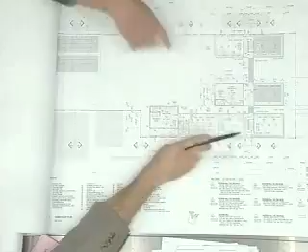If I'm understanding, is it set back in elevation? Let's take a look at what we're saying here - let's look at 3A5.1, see what's happening there.

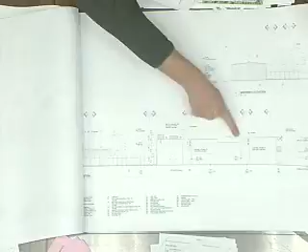This right here. Well, that section was cut this way, so a little bit higher, relative to that. I see, and this lowers down once you get to this low roof deck. But it's stepped back. It's not in the same plane as this.

Okay, there you go. Is that good? There we go. Good. Any other questions? No, thank you. Any more questions, anybody? No? Okay, comments. Who wants to go?

I'll make some comments. I really appreciate the changes that you made since the last review. Not only with the third story element being set back, that's a huge change and I think it does help your project, it's an improvement. The lowering of the parapet heights, sacrificing that ceiling height in order to eliminate a stair tread, really helps the articulation of those side elevations. And all around, I think you did appropriately address the comments that were made last time, so I appreciate that.

I think the only thing apparently that's not on the plans is the detailing of that. It's a very minor element, and I think it could be handled probably by staff. I don't think it matters whether it's steel or plaster, I think it would be fine. So those would be my comments.

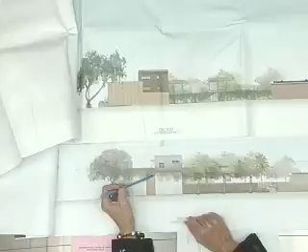So in terms of the massing changes, you've increased the height of this wall by approximately—it's probably going to be about another 4 feet. Well, it had to do with the workspace within. So on the ground floor we have 6 basically workspaces; 4 of those now are at 9 feet 2, and the remaining 2 are 14 feet.

That's the advantage—this is a one-story of wood frame. What Mark is talking about is that in order to make that one more useful to the artists, that one has a higher ceiling space, coming off the intermediate landing of the stair. So we're taking advantage of that, but this is still a one-story behind a two-story situation. Correct.

Okay, so I appreciate the changes as well, because as everybody knows, my hang-up was the third-story element on the south property line that wasn't part of the previous approval. And I just thought that unit could benefit from getting some light and air.

And I also am in favor of keeping the parapet heights the same all the way around, and not having that kind of weird jog parapet. So I am pleasantly pleased that hopefully we can move this project forward.

Yes, Stephanie? One more comment I may offer - we don't have a landscape architect here present, but we do actually have one on our board. He typically makes comments such as when people have these pockets for planting, anytime there's an opportunity to plant, we should encourage people to plant. I'm just saying I want to add that to the comment on this project, that anytime there's an opportunity to plant, that they plant something.